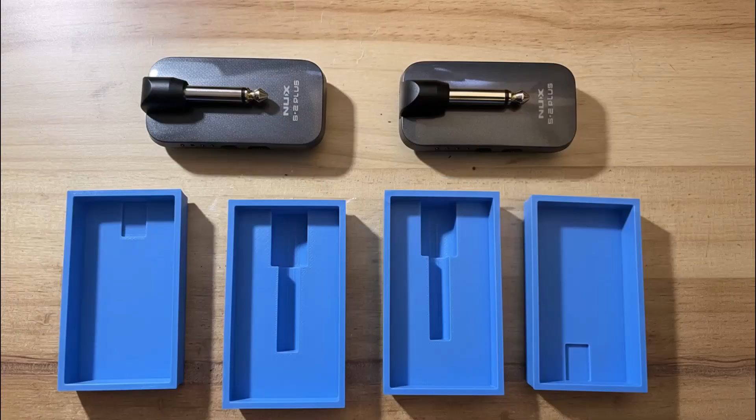In today's video I will use SOLIDWORKS xDesign to change an assembly I created for my guitar gear to adapt it to the gear of one of my subscribers. In my last videos I created a box to carry my wireless guitar transmitters safely without risk to damage them. I started from actual dimensions and created some parts to protect them and a box around those parts to carry

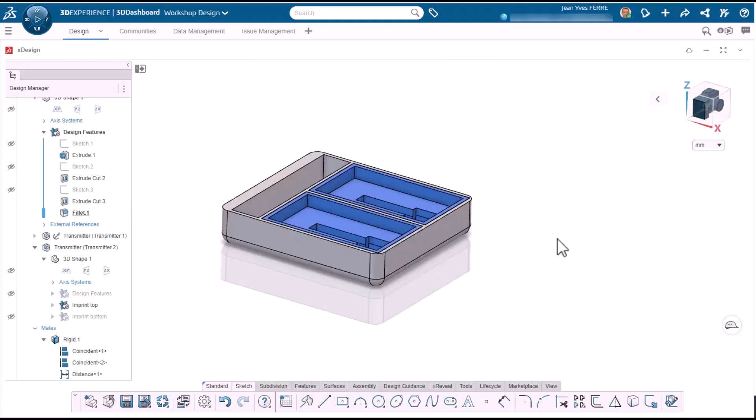them safely. This project interested one of my subscribers, Mark, who had a similar but not the same gear, so he asked me if I could help to create a custom one made for his transmitters. Because we live in different continents, I proposed to create a 3D printing file he could print at home, and he agreed. So we need dimensions.

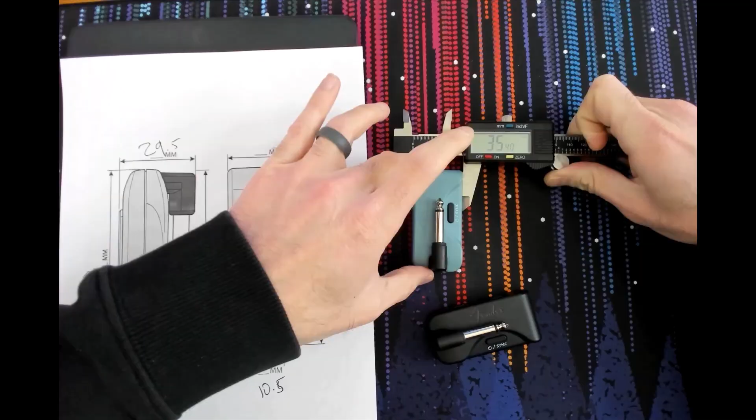As I said, gear is similar but not the same, and the goal is the same as in my last videos. I don't want to damage his gear at all. As you can see, Mark has a caliper and did a great job at taking all the measures for me. He also created a blueprint with AI to display them. That will be very useful. Thank you, Mark. First finding, they look similar, but they absolutely won't fit into my 3D printed parts. So there will be some real changes.

So I start from the assembly I created for my transmitters, but I also want to keep my parts in case I want to print them again. So I use a new branch to create a new version that I can modify without changing my part dimensions. Don't forget to open the new version and you're ready to make the changes. Now I've got a brand new model and I will change dimensions to match the ones provided by Mark.

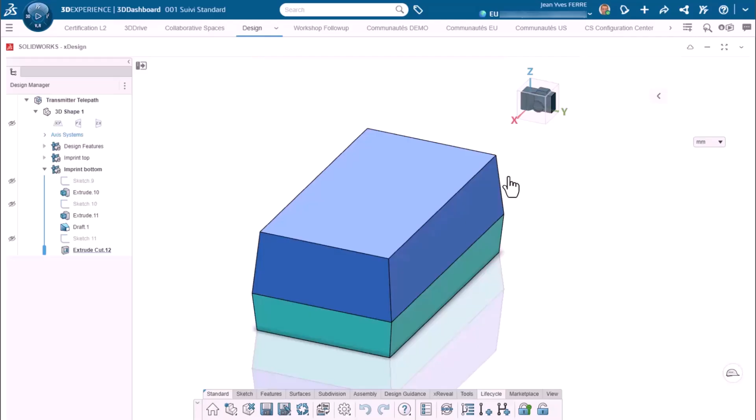I will start with the main shape and I will also remove drafts as his gear is straight. Here I directly enter the values provided and you can see how it's different enough to need a new casing. Depth is also a little bit different, so I change extrusion in one direction and remove drafts. I also need to remove fillets, but you need to make sure you choose delete selected to keep the rest of the features. You may be in trouble if you don't.

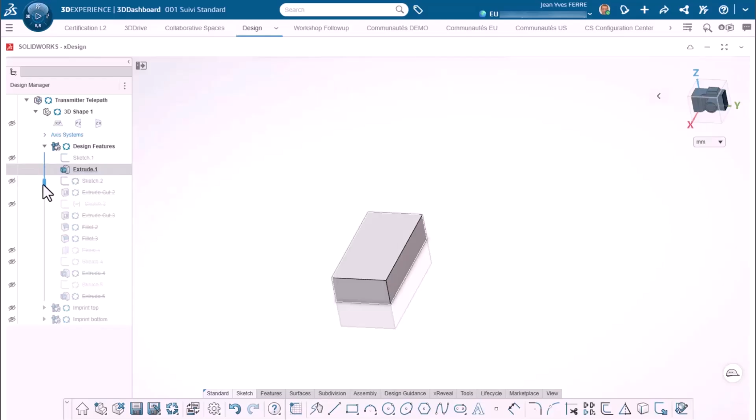Then the rest is just updating a reference that changed in this sketch. I remove the reference and add a new one. This is very straightforward. Next, I check fillets to make sure they are correct. First one is okay, but on the second one, because I removed rounded corners, there is no tangency to handle all the needed edges. So I edit the feature and add all edges I want.

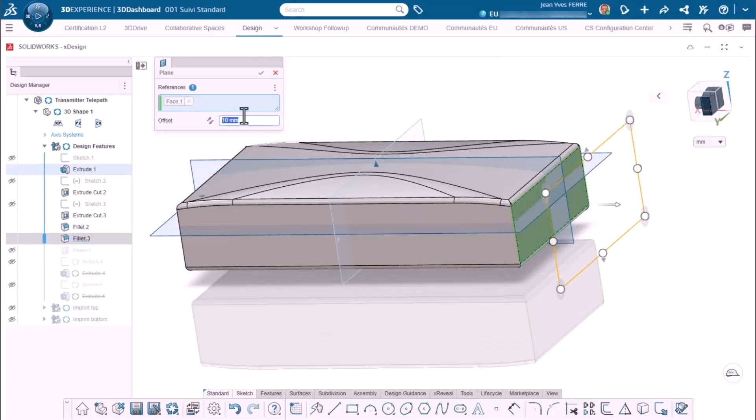For the next plane, this is a little different, because the parting line I used as a reference doesn't exist anymore, so I have to select a new reference to offset the plane by 0.5 mm to be accurate. For the tombstone shape, again, some references have changed, so I replace them with simple references. When I accept the feature, I realize direction was defined another way, so I change it.

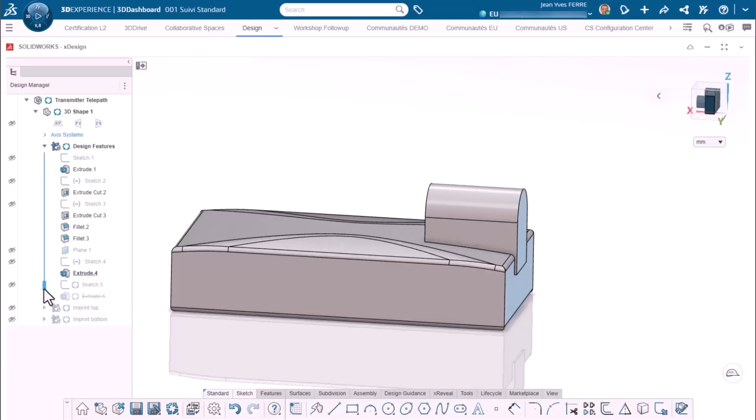Last features rebuild correctly, so I can save and move to the casing parts, the parts that will contain the gear, and that I will build around it. When I edit the first sketch, you can see dimensions that were perfect for my gear are not adapted here. So I measure by selecting entities and pressing M key for measure. I realize part is very close under 75 mm, so I change sketch dimension to 75 and keep the thickness.

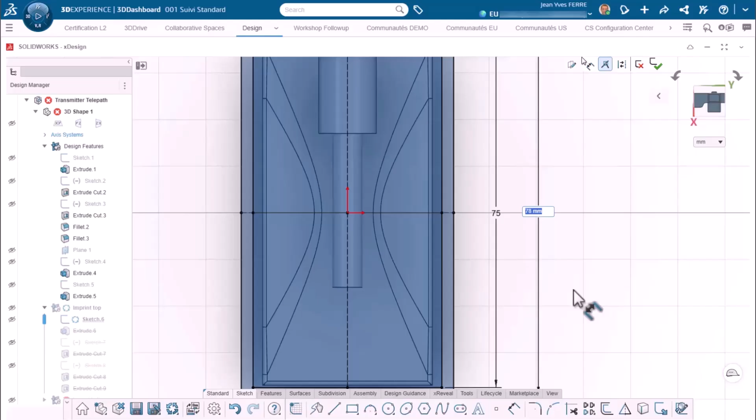I also measure width, but this time part is narrower. So I update dimension from 40 to 37 to keep some clearance and reduce outer value to keep the same thickness too. Once the part is rebuilt, I make sure I display the right set of features in the feature manager on the left, and I roll back the rebuild bar on the first feature. This way I will be able to follow the build feature by feature.

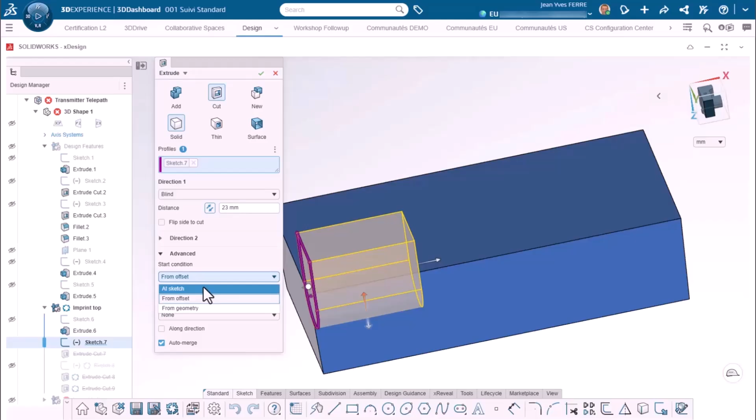After the sketch I just changed, I continue with draft angle because I want to keep room. Then I edit first cavity and change the starting plane so it is exactly where I put the plane on the part above. The rest rebuilds without any error. I can save the model and proceed to the second cavity.

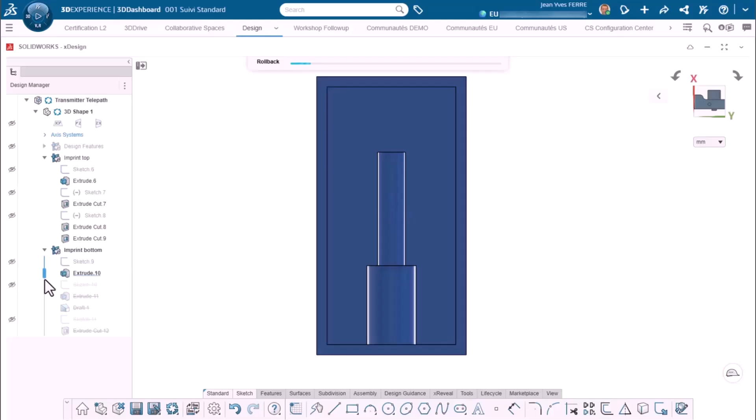As soon as I do that, there is an error in the first sketch, so I use sketch analysis that xDesign proposes on bottom right and accept suggestions. This solves the error and sketch is projected correctly from first cavity. Extrusion is now correct, but when I check depth, I see 1 mm missing. Let's change dimension to 11.5 mm.

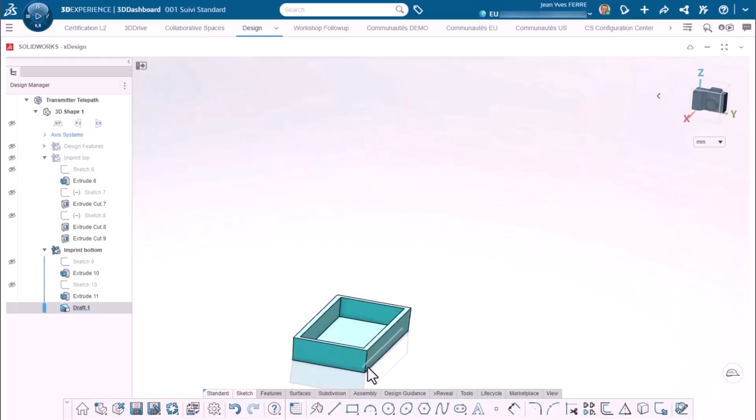Then I check other features and here we can see that parametric modeling, where you define dimensions and relations based on geometry, is a real benefit. I check the remaining features and realize this slot is not relevant because Mark's gear doesn't need it. So I just select and press delete on my keyboard. To finish the cavity I add some fillets on inner edges, but they are more cosmetic than useful as the part won't be damaged anyway. Parts are ready, this is printing time.

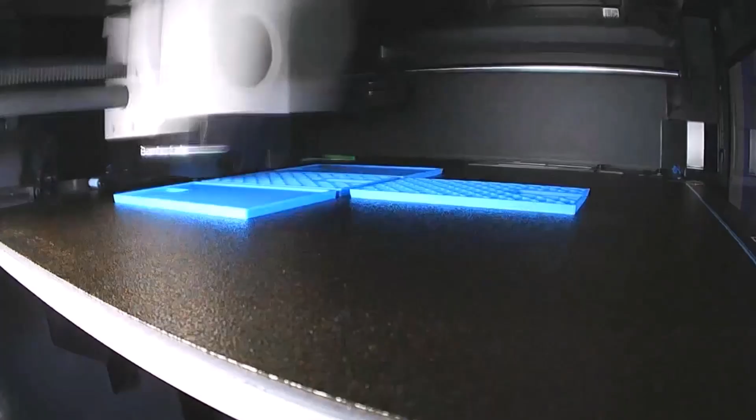Even if I will only send a file to Mark so he can print locally, I will choose STL format for the file. This is the standard format for 3D printing.

Because we changed outside dimensions of cavity parts, casing will need to be adapted to these new dimensions. To make sure I keep my casing parts secure, I add a new branch on my model. So xDesign creates new independent revisions. This way I will still have access to my parts if I need the new print.

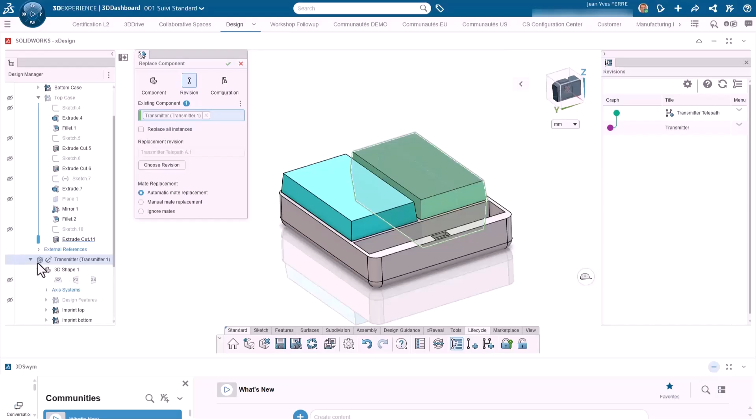First I check I've got the right versions in place. Then I check casing adapts correctly to inner part position. As you can see, casing changes and adapts when I move blue parts. Parametric modeling does that. This is what SOLIDWORKS xDesign does.

So I define spacing between blue parts with this mate dimension between 2 points. 2 millimeters seem to be enough. So let's move on.

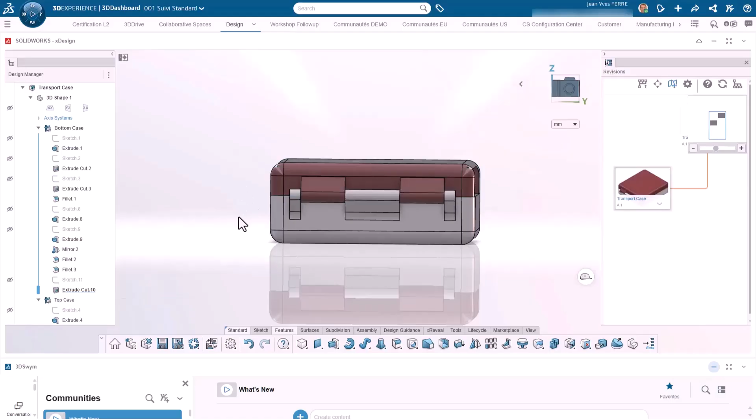There is obviously an issue, as you can see with the hole here. To find when the problem really occurs, I move the rebuild bar above the hole and see what the problem is. It looks like edges defining cavities lost their reference. As I don't want to spend time finding why, I just delete all the edges and recreate them from the underlying sketch from bottom part.

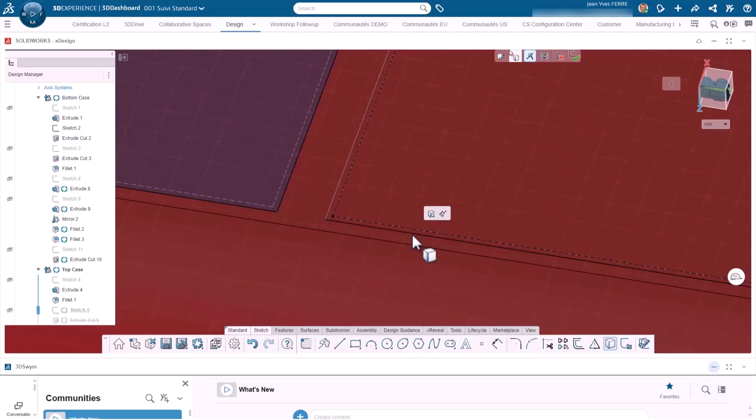As you can see, when I select an edge that belongs to a loop, xDesign gives the opportunity to select the whole loop with this icon that appears exactly where I need. I do this for both cavities. Rebuild and problem is solved. Here I detect a peak on the corner. I will solve that later with case dimensions.

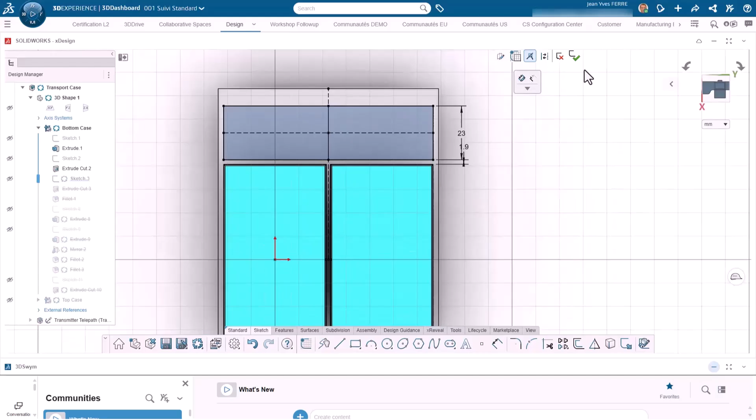Now I will rather increase pocket size I created to store charging cable. I found it was too small on the part I created for myself, so I give it another 5 millimeters, first with outside shape, then pocket itself. Done. Then I solve the peak I detected earlier, changing the offset size to give more thickness.

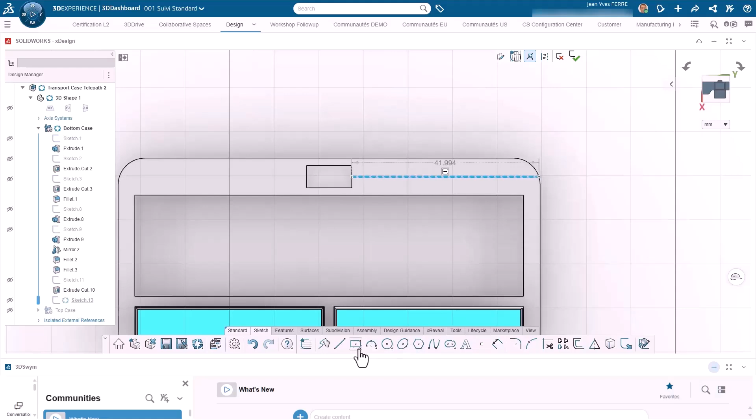Because unfortunately for my schedule, I'm never done improving my parts, and I found the locking system with a magnet was not sturdy enough, I decided to add some jaws. This will be rather simple, teeth on one side, holes on the opposite part. This way there will be some resistance to any shear force.

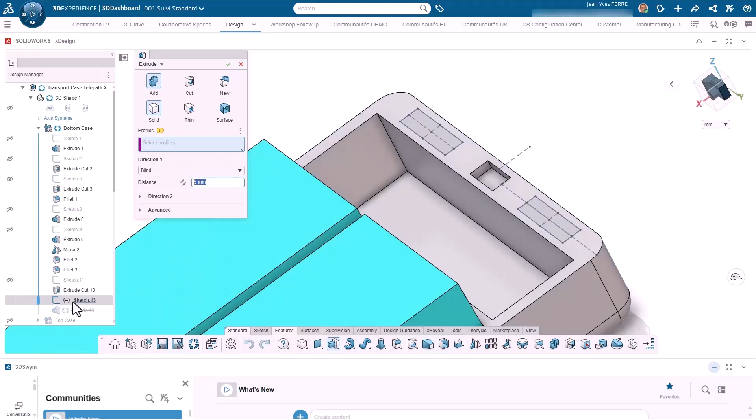I leverage the thickness I left for the magnet and add a rectangle of 20 by 5 millimeters. Then watch how I leverage geometry to create an axis in the middle of the part, just selecting the middle point of magnet pocket. So I start with teeth with a draft angle to help centering teeth in the holes when I close the case. Of course I finish with a fillet on top face of the teeth to avoid sharp edges.

Now let's make holes on top case. For that I show the top case part and I don't forget to activate geometrical set by double clicking on it. I see it worked because rebuild bar is now displayed next to top case features.

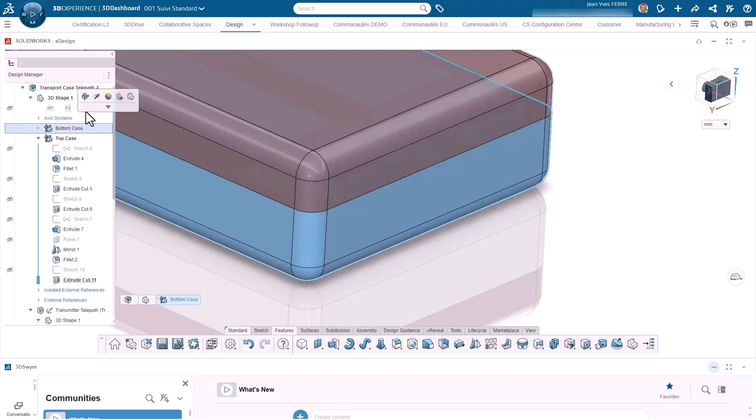I leverage existing teeth geometry to project contour on the other part. And to do that, I create an offset of teeth contour from one part to the other. This way, if I change teeth size or position in the future, holes will follow. I do that for both teeth with a standard offset value of 0.2 millimeters.

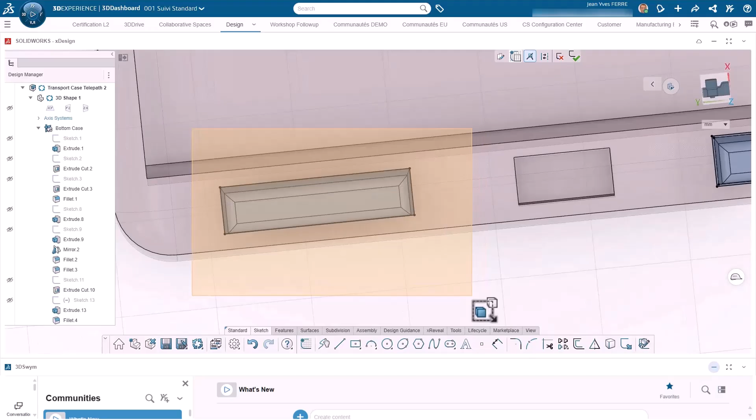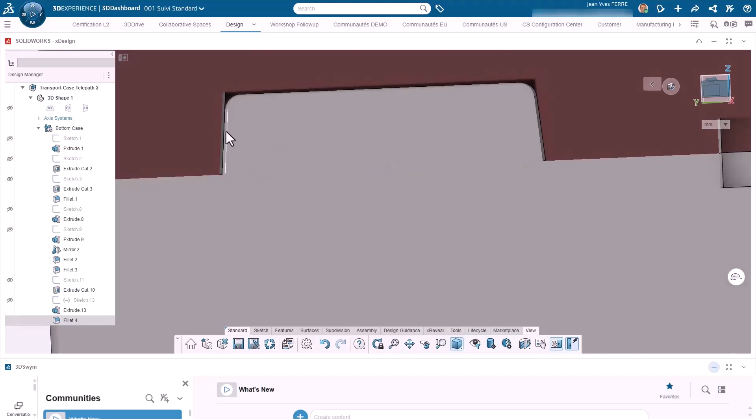When I make the cut, I also add this 0.2 millimeters to the extrusion depth to make sure teeth will never prevent closing of the case because it's too high. I also add the same draft angle for the centering and I check everything is correctly in place with a section view. As you can see, there is a small gap that will compensate for 3D printer accuracy, so in worst case it will still work correctly. So now casing is finished and ready to send to Mark for his own printing operation.